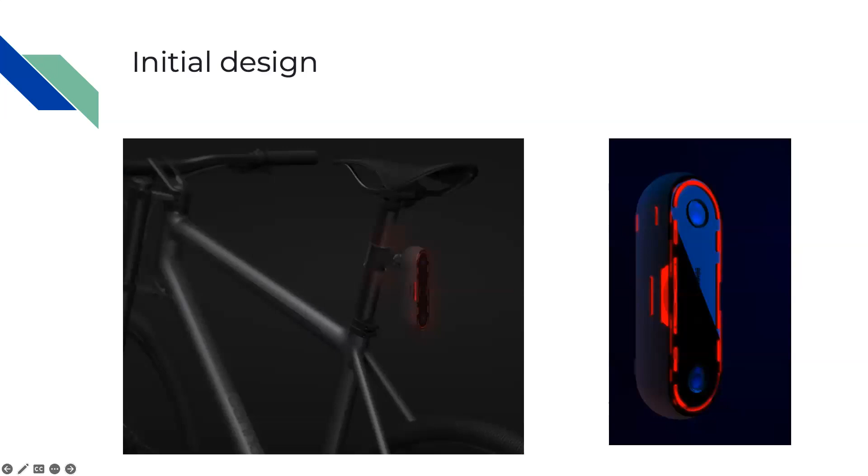Here's what the concept and initial design looked like. So the initial design encompasses those 5 things that are needed: something that was embedded, small size, low weight, low power, high performance, high frame rate, low latency, IMU, spatial for disparity depth and time of flight. And then on-device AI and CV.

So what this means is that you'll be able to take all that data, which is processing nearly 10 gigabytes per second, and is able to do all the AI and CV functions, then able to do really cool things like running a neural network model based on any way you're perceiving the world.

So here's what it looks like today. We offer the USB-C or PoE powered devices that can help you solve real world problems and make sure that it's more efficient using Oak cameras.

And speaking on efficiency, when we set out as a company to make an impact in this world, we saw that it took $2 million and 2 years to develop and implement a robotic vision system. With Luxonis cameras, you can start with $200 and about 2 hours to implement a robust robotic vision system.

A lot of companies typically focus on one of the things listed here, either a hardware company, a software company, or focus on the cloud or AI simulation. But we at Luxonis offer the full stack. And as you scale and need to manage thousands of cameras, Robot Hub, our cloud controller, will be able to manage all of that for you. We'll discuss a little bit about Robot Hub later on today.

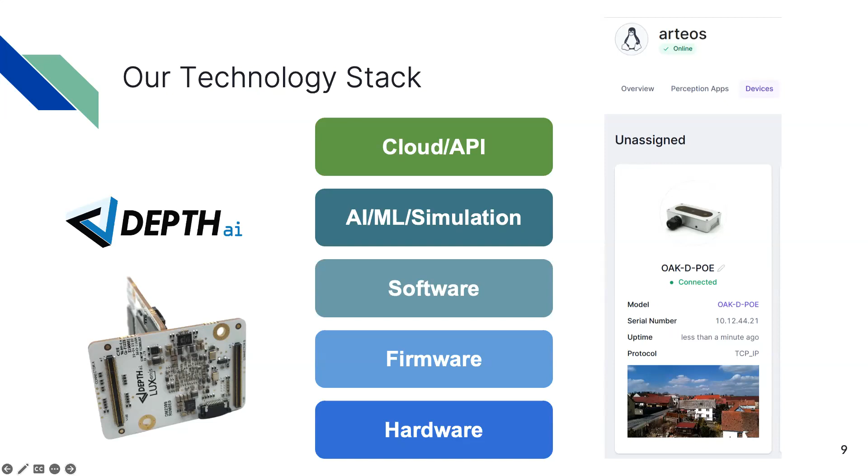So in speaking to our founder, he actually started the idea back in 2016, 2017, working on the concept that I showed you earlier. But Luxonis in 2019 was officially founded and started building a product platform. In 2020, we launched our Oak D on Kickstarter, which generated $1.4 million and 6,600 backers. And in 2021, we launched the Oak D Lite, generated over $1 million and had 8.6 thousand backers.

And in 2022, we launched that Robot Hub that we'll be able to discuss later on today as well. It's a cloud API solution to enable customers to query data continuously to improve their AI training and performance.

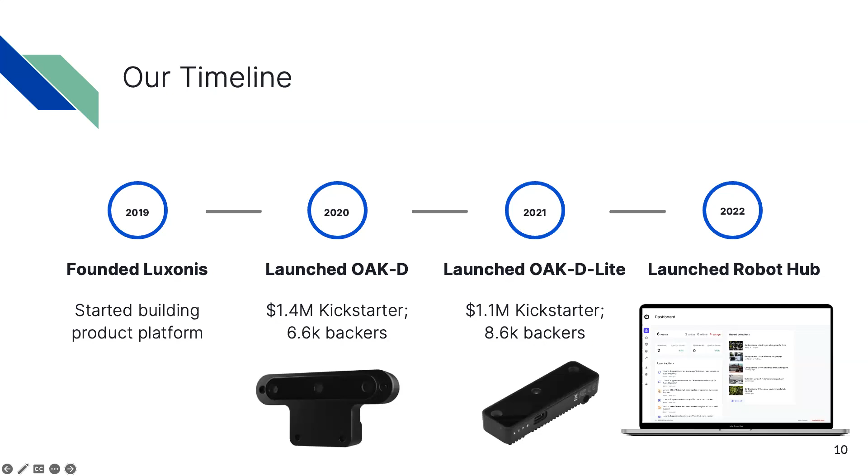Our team is diverse and highly dense throughout the world. Our founder and board member is Brandon Gilles. Vlad is our co-founder and CTO. You have myself. Bradley Dillon is our new CEO. And then Erik is one of our first employees as our director of applications engineering. We have offices all over Europe. In Asia, we have it in Hong Kong and Taiwan. And our headquarters is near the Denver, Colorado area.

So our largest competitor in this space is Intel RealSense. Last year, they announced that they were leaving the market, and then a few months later, they announced they were coming back. So customers had low confidence or were looking for alternatives. That's how a lot of people have started or will start using Oak cameras, because we have been fielding a lot of those calls today.

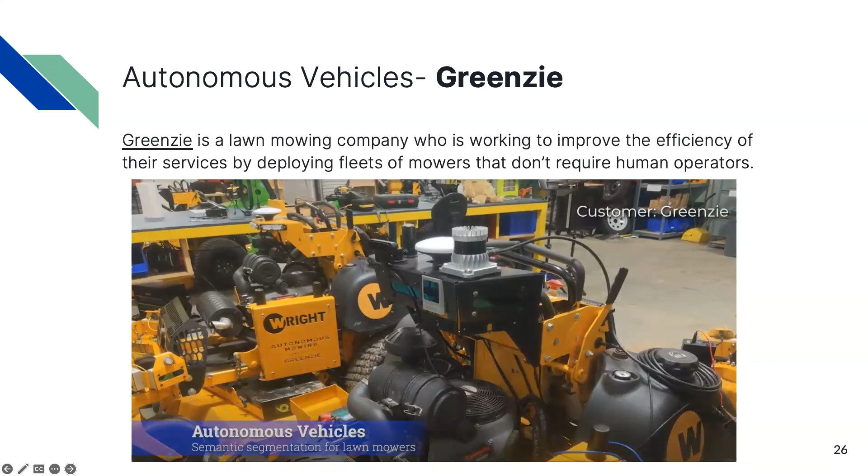All right, thanks Erik. So we'll jump right into our application. As you can see, an Oak D camera has been installed on an autonomous lawnmower using semantic segmentation.

So the area in green communicates a blades-on command to the mower. You can even notice the sprinkler head that you're seeing right there. And the area not in green tells the mower that the blade should be off and avoided in this example.

Here's an example in healthcare. They've used our Oak cameras for monitoring babies in the NICU. Instead of putting all the sensors on the baby, Oak minimizes the need for invasive equipment. So you can monitor body position, breathing, stress, and heart rate with our cameras.

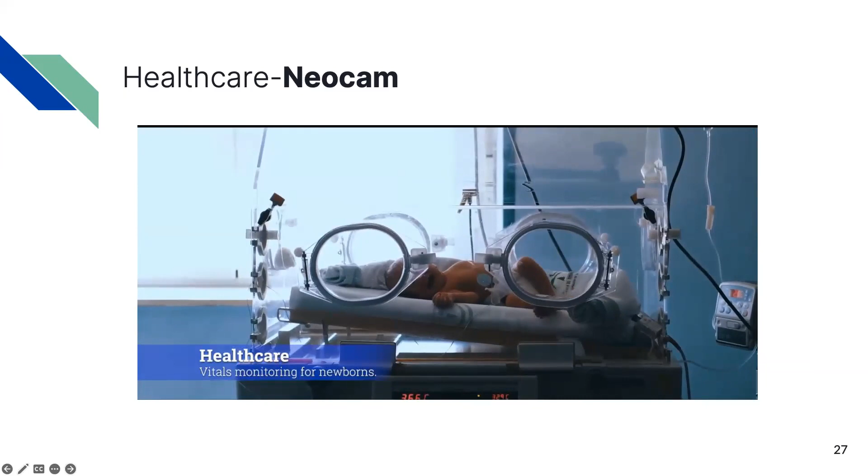Example in construction and safety, working with Cobra Vision. It's a construction site monitoring system to detect people, vehicles, structures, and equipment. The goal was worker safety. There's a lot of injuries that are preventable at job sites if people wore proper PPE. This is just one example, so hopefully it sparks some ideas of where you can use our products to help with preventable injuries.

There's a lot of examples that have come across my desk, like tree cutting, all that stuff that people no longer have to do with robotic vision implemented into their system.

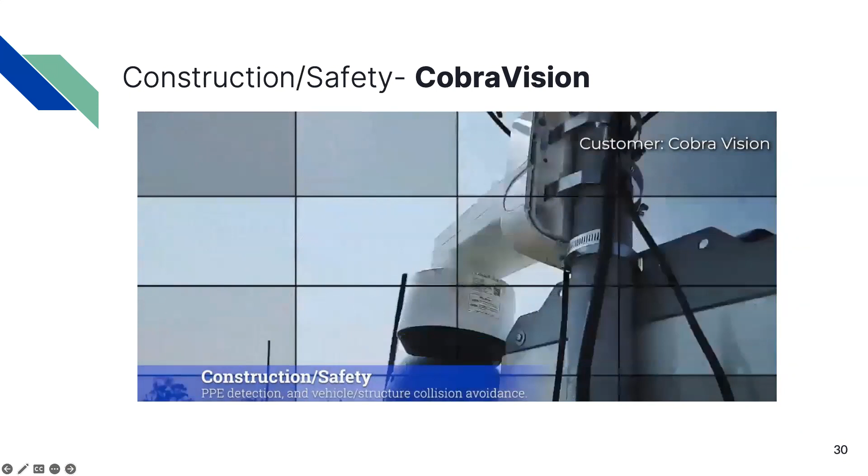Moving on with construction and safety, what we wanted to figure out was if people were wearing hard hats, safety glasses, or a high visibility vest. In this scenario, they actually had active surveillance on the construction site, as well as IDing the structures, vehicles, and workers. You can see the pylons there - if they're driving too close, that can be dangerous, so that will send an alert to their manager so they can have a review on the process. You can see they can detect the people, the hats, the vests, the glasses.

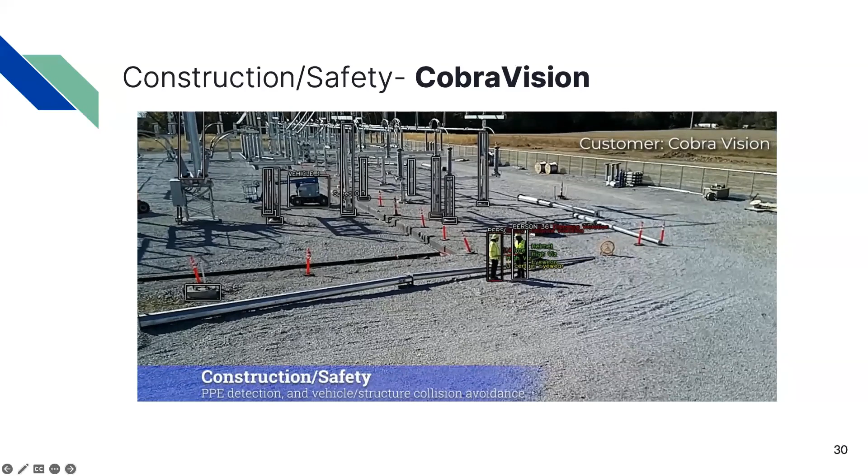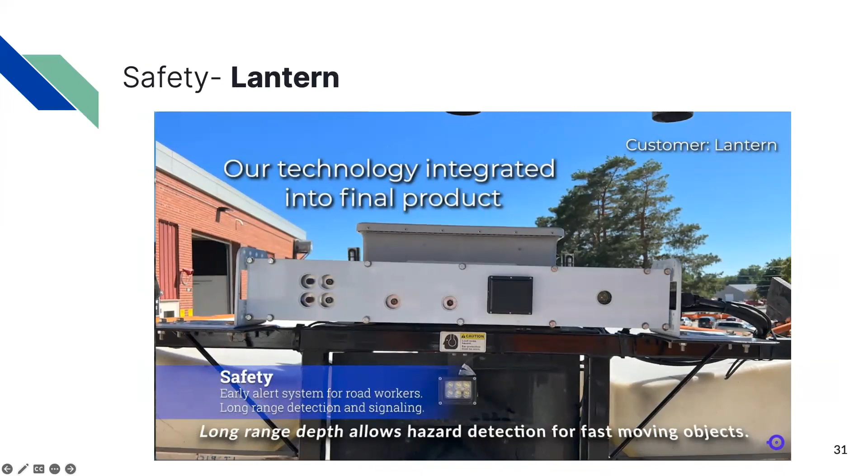Here's an example with Lantern. It's a long-range depth example where it allows for hazard detection for fast-moving objects, alerting workers with enough time to avoid collision and accidents.

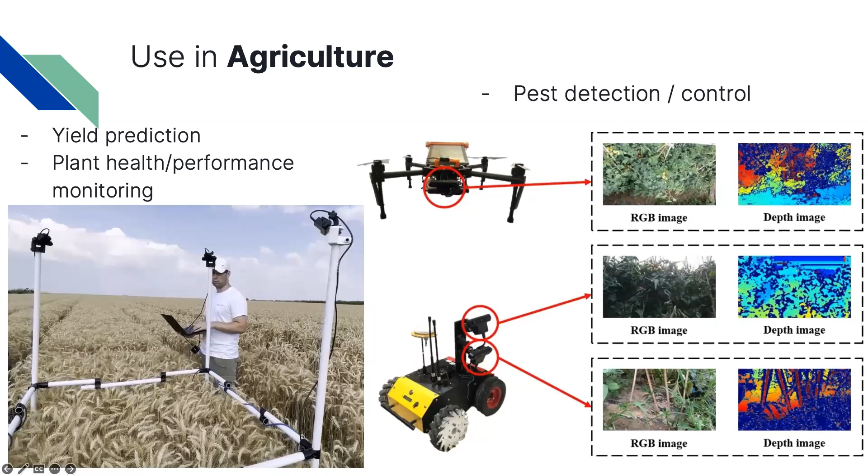Another example in this space is pest detection or control, where it can send out robots, and as it recognizes pests, it can shoot pest control. There's a lot of examples as well in some of the OpenCV competitions that we've done, and we can discuss that a little bit later.

Here's an example in manufacturing. Toyota North America uses AI to help them make more intelligent decisions in its factories regarding quality, safety, and productivity using our Oak D cameras.

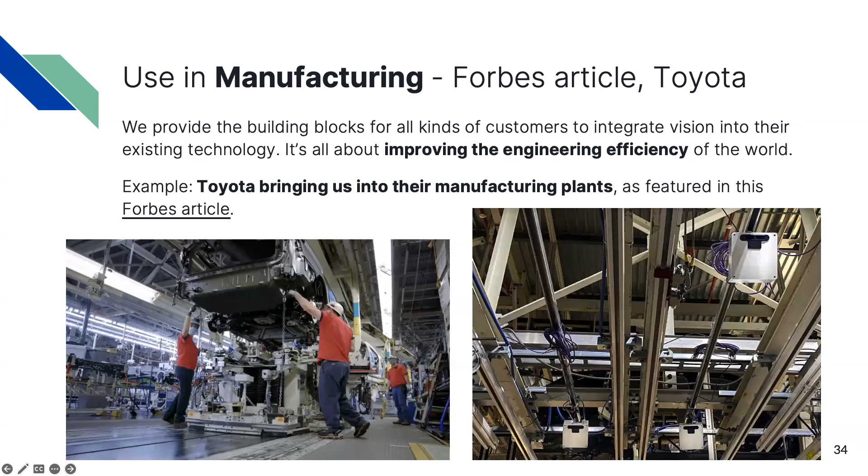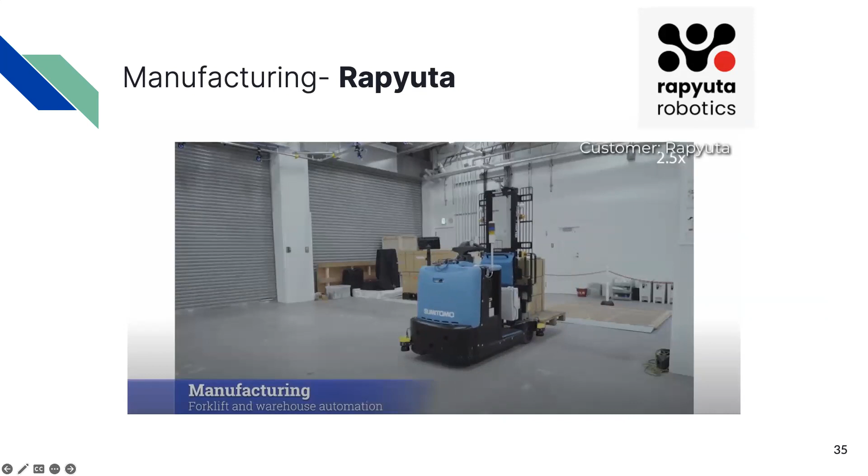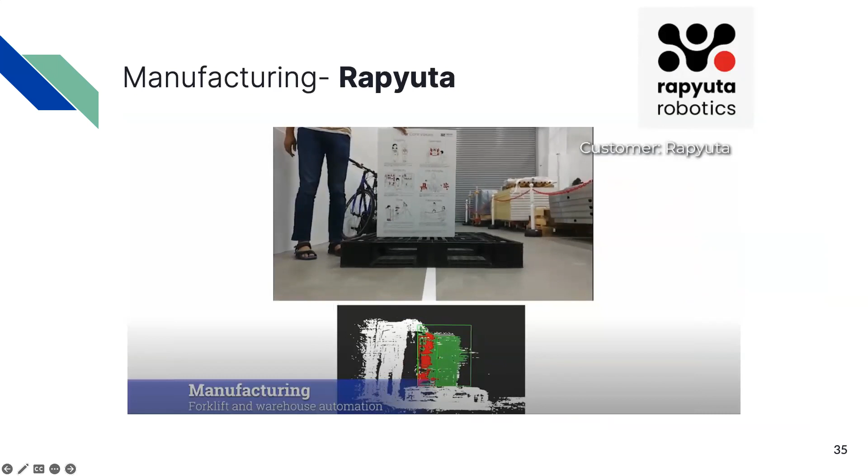Here's an example in warehousing and manufacturing. Rapyuta has an autonomous forklift to detect depth, so it can navigate around obstacles and identify target objects like pallets. They use pose estimation of the pallets on the device itself to be able to identify where it is and use the forklift to pick up the pallets.

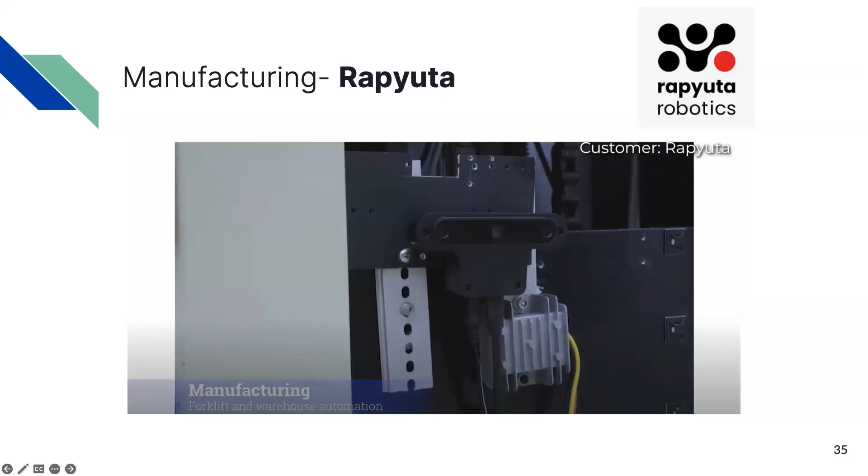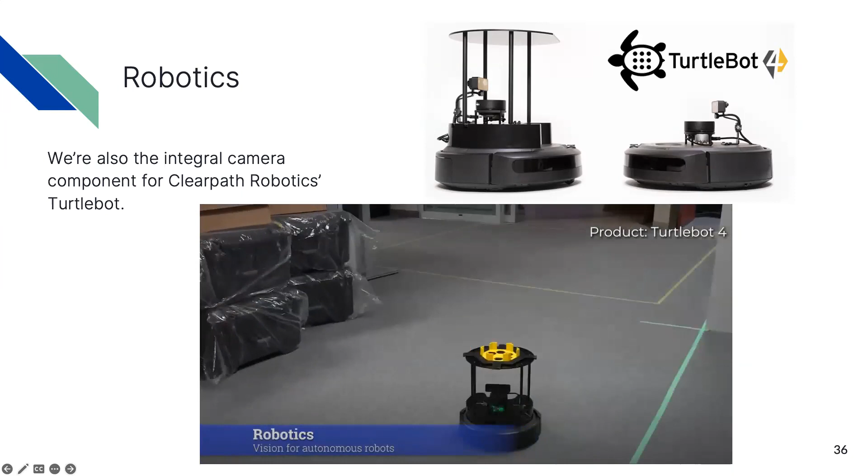Here's an example in robotics. ClearPath uses TurtleBot, using our Oak D Lites and Oak D Pros. It's the world's most popular open source robotic platform for education and research.

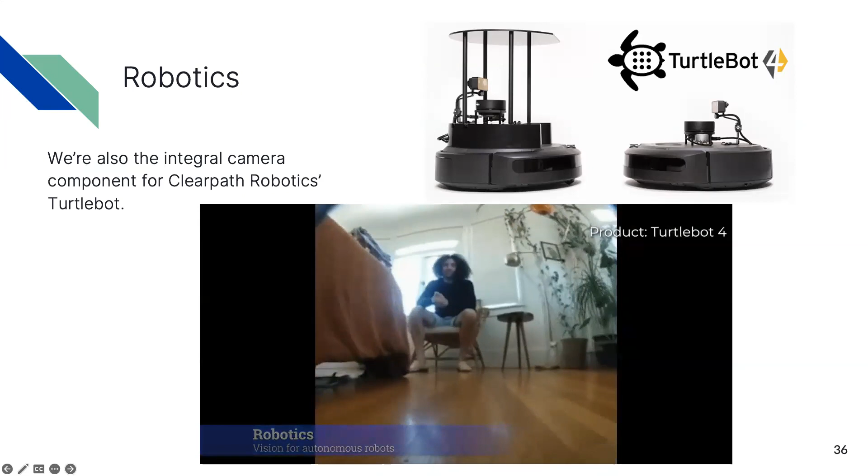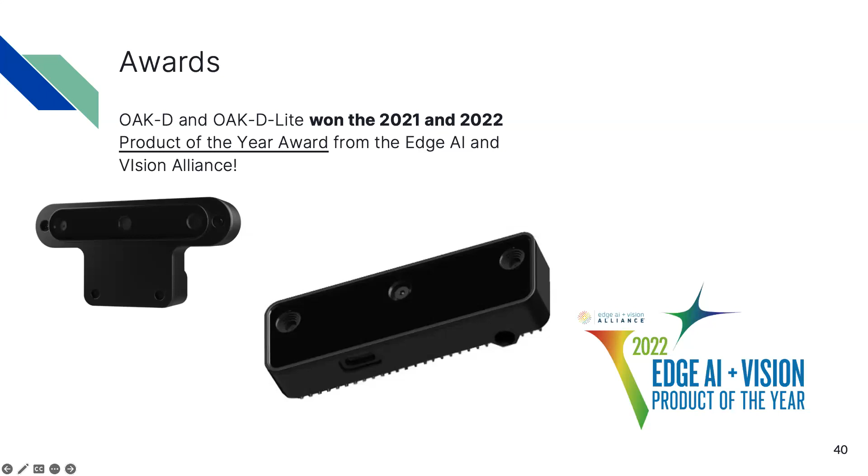So awards that we've won in the past, the Oak D and the Oak D Lite has won the 2021 and 2022 Product of the Year Award from the Edge AI and Vision Alliance. And then recently we attended CES and it won the 2023 Honoree Award for OAK-SoM MAX.

So the OAK-SoM MAX features the RVC3 and a quad core ARM CPU. The Oak system on module allows integration into top level systems with a need for low power, high performance, real-time AI and depth perception. And with the OAK-SoM MAX, it's out of the box, connects with Robot Hub, which is our cloud platform, which allows for an end-to-end integration of the perception stack.

And introducing RAE, our latest Kickstarter. So RAE is the first ever fully formed robot from Luxonis. It's open source and packed with power. It's got that quad core ARM processor that I mentioned earlier into the camera itself. It will allow more robotics application on the devices. Works with ROS2, SLAM, RVC3, Depth AI, and much more. It comes standard right out of the box.

RAE can be used in combination with Unity for simulation and machine learning. And you can connect it with Robot Hub, as I mentioned. And RAE also allows you to test out our different sensors and apps easily. So if someone wants to evaluate our Oaks quickly, RAE could be your solution instead of those modular devices that we have.

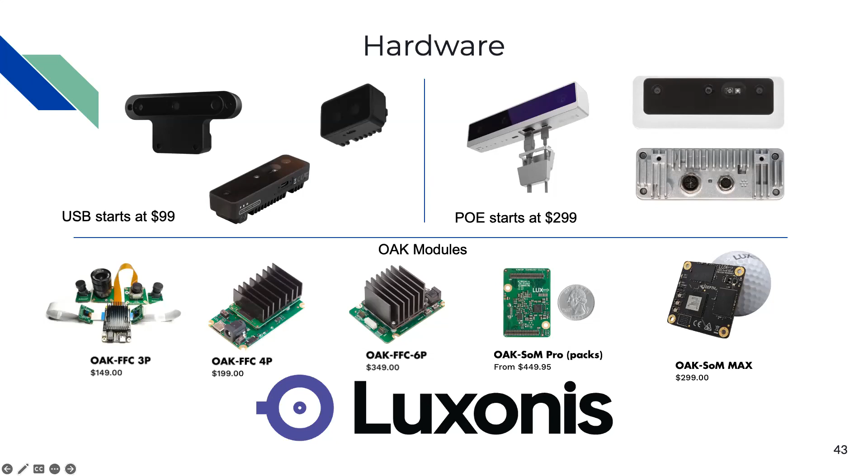Thanks, Erik. So jumping into Robot Hub real quick, it's our cloud and API solution to enable customers to query data continuously to improve their AI training and performance, like the example we shared with Ampere Racing earlier. So you can monitor thousands of Oak cameras remotely. You can check on their status, installs, and applications that it's running. It can deliver real-time video streaming directly to your browser.

What else? Robot Hub includes integrated IDE for simple in-browser coding of visual apps. And it provides simple installs for Oak cameras requiring only a single command as well. So any other thoughts that you have that I missed, Erik, that you want to cover on Robot Hub?

Yeah, we're also really excited for the upcoming year because we want to expand to the AI as well. So as Tony previously mentioned, with Ampere Racing, it will be able to stream the images, create the data sets, and then also retrain the model on the cloud, and then deploy it to all the different devices that you have, with the ability to A/B test, and then select the best performance model to then deploy it to all the devices that you have.